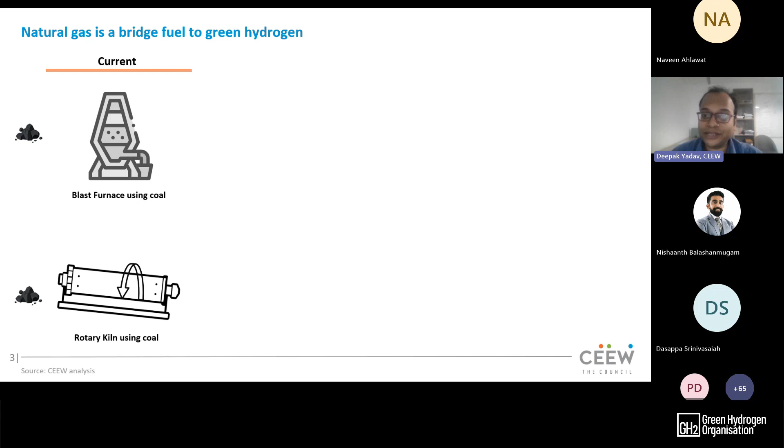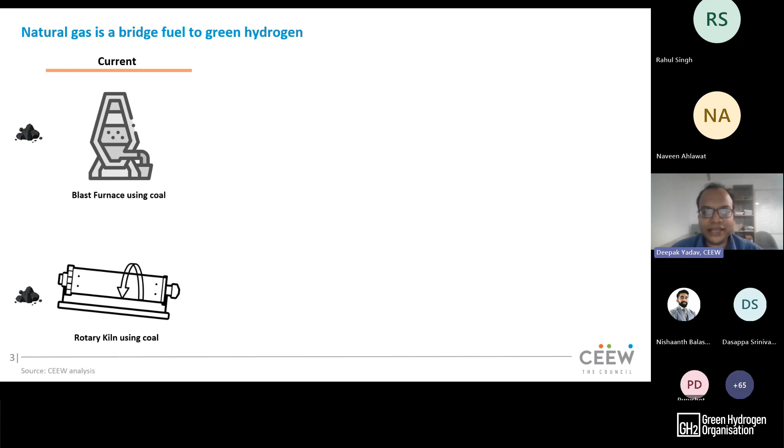The key thing here is that most of the current primary iron making technology in India is dependent on use of coal. Blast furnaces, for example, use coking coal, which is imported - in fact all of the coking coal that we use in blast furnaces in India is imported. There is also the rotary kiln, which uses partially imported coal, partially domestic coal, but these are primarily all coal-based iron making production pathways in India.

A strategic fuel for transition towards green hydrogen will be natural gas based shaft furnaces. I say that this is a strategic fuel because with the use of shaft furnaces, if you invest let's say around 1300 to 1500 crore setting up 1 MTPA of shaft furnace, you can have the same shaft furnace, but as and when the cost of green hydrogen reduces in the future, you can start blending in green hydrogen.

So you can start with, let's say, 100% natural gas use in shaft furnaces, and as the cost of green hydrogen reduces, you can start blending in 5% green hydrogen, then 10%, 15%, and gradually, as the cost of green hydrogen achieves parity with that of natural gas, you can seamlessly transition to 100% green hydrogen. Therefore, the key decarbonization strategy for India for greenfield capacity expansion will be not to invest in blast furnaces and rotary kilns, but to start investing in natural gas based shaft furnaces so that we can eventually transition to green hydrogen based steel making. That is the transition strategy.

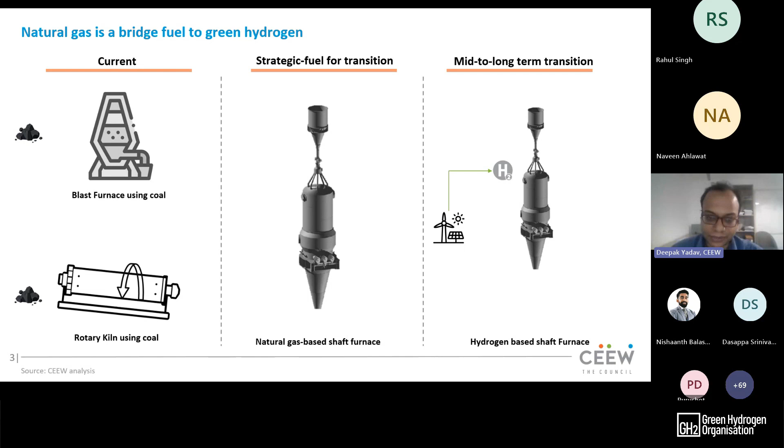Now, green hydrogen broadly finds applications across four sectors in the iron and steel industry. The first is green hydrogen can be used in blast furnaces, which is at TRL 5 globally - there are pilot scale demonstrations. ThyssenKrupp, for example, has injected green hydrogen in one of its blast furnaces and tested it for over 24 hours. Nippon Steel has an experimental blast furnace.

The experimental blast furnace is a replica, or a lower capacity blast furnace, but it operates similarly in principle to the blast furnaces. You can do all kinds of experimental work there.

Nippon Steel has actually tested hydrogen injection in blast furnaces, and they have estimated around 22% emissions reduction over a normal blast furnace that operates with coal alone.

In the Indian scenario, I think most of you might have read news articles recently. Tata Steel injected about 6 kgs of hydrogen, which is a very small quantity, around 3 to 4% of the total energy required for operating a blast furnace. But nevertheless, they have injected 6 kgs of hydrogen in the blast furnace. They have reduced coke consumption by around 10%, and reduced CO2 emissions by around 7 to 10%. So this is what is happening globally on hydrogen injection in coal-based blast furnaces.

Hydrogen can also be blended in natural gas-based shaft furnaces. In fact, the proof of concept of blending hydrogen in natural gas-based shaft furnaces was demonstrated in the 1990s, where 90% of the natural gas used for producing iron or DRI was replaced with hydrogen. They didn't use green hydrogen at that time because green hydrogen was very expensive. But the proof of concept does exist globally.

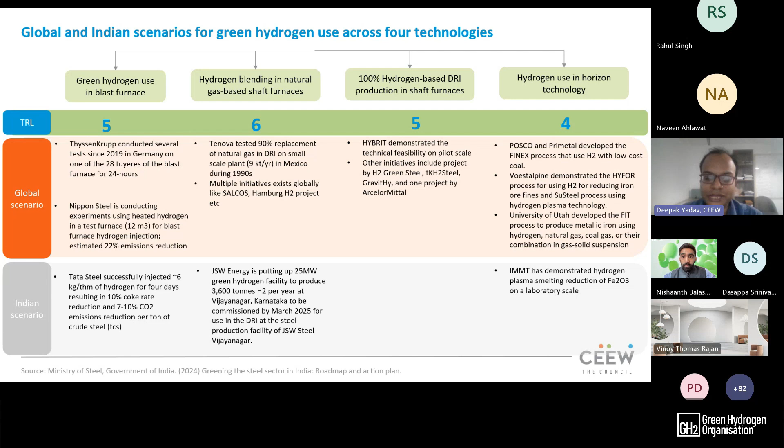Which brings me to the final slide, where we look at the basic techno-economics of hydrogen injection across three major pathways. First, let's talk about hydrogen injection in blast furnaces. Roughly, and this is again coming from the Ministry of Steel report, about 15 kgs of hydrogen can be injected per ton of crude steel.

Tata Steel demonstrated about 6 kgs of hydrogen injection, and there are also other studies that say this number can be increased from 15 to 28. There are studies on hydrogen injection through shaft furnaces, where the amount of hydrogen that can be injected is significantly higher. Nevertheless, we'll assume a conservative 15 kgs of hydrogen injection per ton of crude steel, which means the entire blast furnace capacity in India can uptake around 1.17 or around 1.2 million tons per annum of green hydrogen.

Our national green hydrogen mission has set a target of producing 5 million tons per annum of green hydrogen, so you can relate the consumption volumes possible in blast furnaces in India. Now, in case of blast furnaces, the biggest challenge is that with injection of 15 kgs of hydrogen, the emission reduction we can have is just about 8 to 10%, which is a very small number on a pan-India scale.

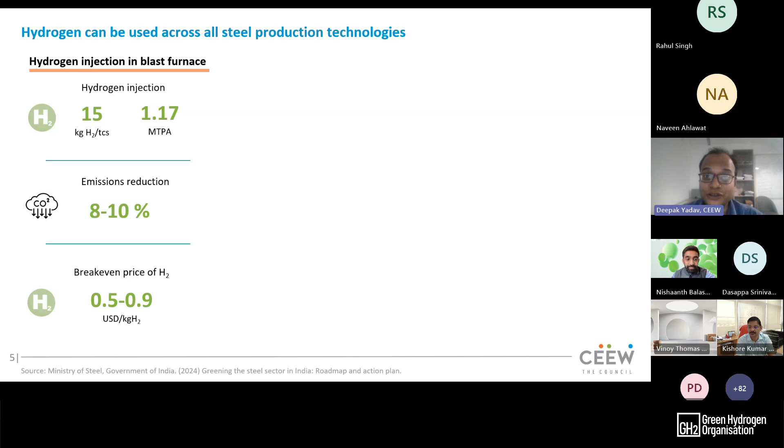The biggest challenge is cost. Why is this not happening? Because the break-even cost of hydrogen for injection in blast furnaces is sub $1 per kg. So we talk about one target on green hydrogen, but this is even below that particular target. Therefore, hydrogen injection in blast furnaces might commercially materialize once the cost of green hydrogen reduces significantly, and there is a certain carbon tax that is also levied.

The second option is hydrogen injection in natural gas based shaft furnaces. Here I'm basically talking about the existing shaft furnace capacity in India, which uses either natural gas or other gaseous fuels, like coke oven gas or other industrial off-gas. Since these shaft furnaces are very old vintages, we talked to a few industries and assume that around 60 to 65% of the natural gas consumed in these furnaces can be replaced with green hydrogen.

Therefore, assuming 60 to 65% replacement, we can start consuming around 42 kgs of hydrogen per ton of crude steel. The shaft furnace installed capacity in India is very low, around 12 million tons. So the total hydrogen consumption possible is only 0.4 million tons. The good thing is, unlike blast furnaces, with green hydrogen injection about 55 to 60% of the total emissions from the natural gas route can be mitigated.

The residual emissions can be mitigated by switching from grid electricity to renewable electricity, and there will be some emissions left since hydrogen isn't replacing natural gas on a 100% basis. The break-even price of hydrogen to replace natural gas is around 0.75 to $2 a kg, depending on the price of the incumbent fuel. For $8 per MMBTU natural gas, the replacement cost is around 0.75. If it goes to 16 to $18 per MMBTU, hydrogen breaks even at $2 a kg.

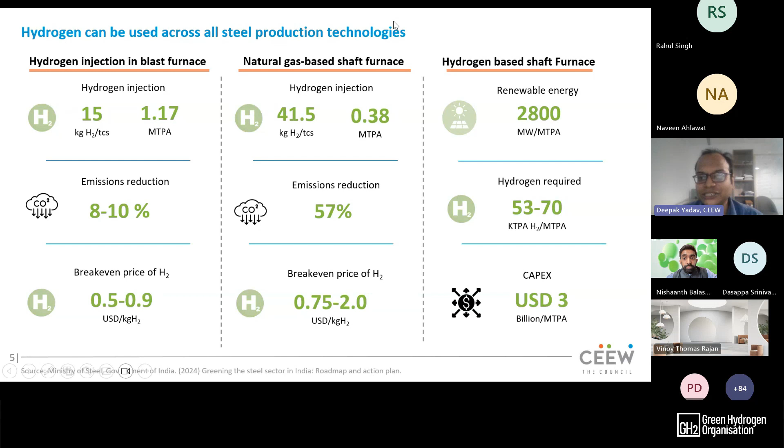There are also corresponding cost implications. For example, using a 100% hydrogen-based DRI unit, your cost of iron or steel is around 50 to 60% more expensive compared to the blast furnace route. So those are the challenges associated with hydrogen-based shaft furnaces.

I just have 3 slides to present, Nishaanth. So I'd like to hand over the stage back to you.

Thanks very much, Deepak. And I like what Shweta asked in the group, which is, what does TCS stand for? If there are little things like this you want clarification on, please write it down in the chat, because the idea and goal of this webinar is to educate the larger audience on where we can apply green steel or green hydrogen in all of these industries.

Well Deepak, I think you've highlighted quite a lot of important points in this presentation. But clearly, the steel industry produces almost 3.5 billion tons of CO2 every year. And in India alone, our per-ton emissions from steel is the highest in the world, between 2.5 to 2.7 kgs of carbon emissions per kg of steel.

So I think we have to do quite a lot. As we go into this webinar, we'll hear from industry experts on what the government has done and what steps companies are taking to decarbonize this. If you have more questions on these different steel making pathways, please put it in the chat box. We'll answer all these questions as we go into the panel discussion.

But before we go into the panel discussion, let me introduce Professor Dasappa. Professor Dasappa has been one of the leading minds here in India promoting biomass-based pathways for green hydrogen, and he's quite a pioneer in the work he's undertaking. Professor, I'll leave it to you to give a small introduction about yourself, and then we can go through your presentation.

Thanks for this. I'd like to mention that while I have been working in the area of biomass - basically combustion and gasification of solid, liquid, and gaseous fuels - over the last three decades, we have been venturing into something which this country really requires attention on, unlike other resources which have got benefits through policies that have taken place. Keeping that in mind, I'll introduce the technology we are trying to look at.

I just thought I should say that everybody is interested, like what was presented by the previous speaker, as there is quite a bit of interest taking shape in terms of what needs to be done, how do we really look at it. The major emphasis has been on making sure we generate hydrogen through electrolysis. That's one route which has been there, and one is not against it, because of what happened with solar and wind in this country compared to other resources - it seems to be taking a pathway along this direction.

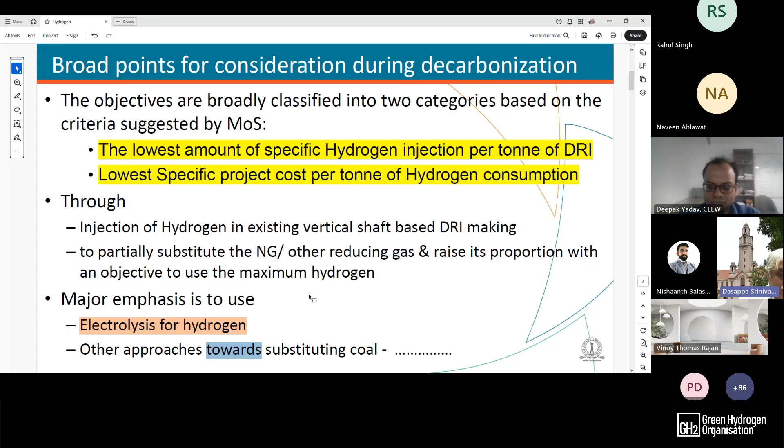Internationally, if you really look at it, people have been looking into various aspects of how we decarbonize. There are very serious contenders with respect to the technology itself, and a few technologies have also been adopted in this country - a couple listed here show the reduction in carbon footprint significantly when you move from a solid fuel to a gaseous species. That's very evident, and people have been trying to see whether they can reduce the footprint further by using hydrogen. Hydrogen coming from various sources is what people have really been looking at. And there are small spurts of things happening in terms of using a naturally available substance called biomass.

The reason I'm calling this renewable hydrogen, or green, is the recent concept people have been talking about. In terms of renewable, there are only two strong contenders with respect to hydrogen being part of their natural resource - one is water, second is biomass. Water, through electrolysis, you get hydrogen. The other is through the other process which I'm going to introduce to you.

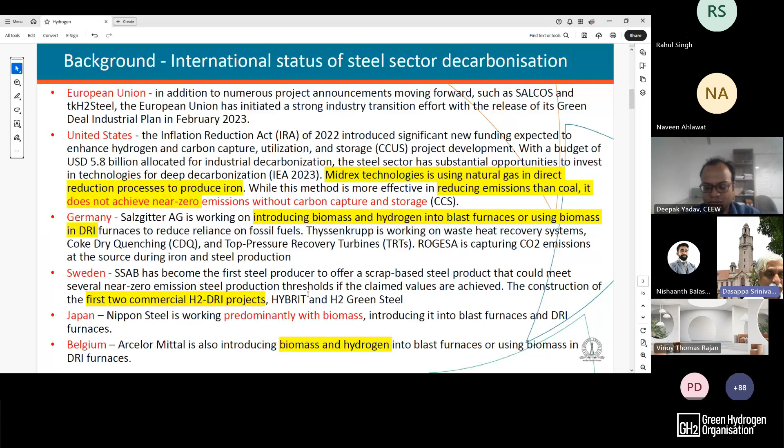People have been talking about biomass in various other countries, but probably it has not taken shape as much as what we intend to do in India. I think this is something we can discuss. I should also confess that it's only in the last 6-8 months we have been venturing into hydrogen for the steel sector through the biomass route. In terms of the overall process, we have understood significantly over the last 6 months, and we believe there is a significant amount of penetration which can be done.

Keeping this in mind, there are projections cited similar to what was presented earlier by Mr. Deepak, saying that unless you really peg your cost very, very low, you will not be able to really look at what can happen. Here we are trying to look at reductant, not exactly hydrogen - it could be a combination of CO and H2, which is also very critical in terms of the overall process people have been looking at.

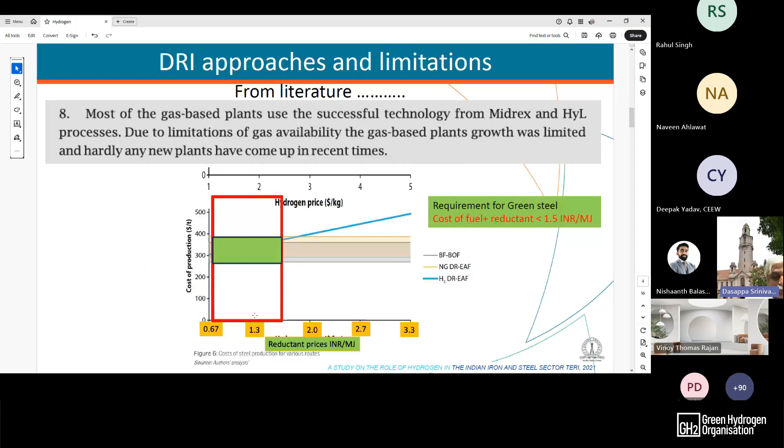See, for example, this plot shows the hydrogen cost which is required, which was the number projected for decarbonization. I'm trying to bring out the reductant price in Indian rupees per megajoule. If we can be within this box, it can become very competitive - say less than about 2 rupees, maybe about 1.5 rupees per megajoule, is something we can keep as a reference.

The process I'm looking at is taking a solid fuel. People who have been accustomed to looking at gasification of coal, I think this is something similar, except that this is going to be completely green, being a resource which is renewable by nature. And the solid fuel gets converted to gaseous fuel.

On this platform, in terms of generating electricity and using it in a gas turbine, we have done quite a bit of work. We have done technology transfer across the globe, including somebody like GE taking technology from IISc. We deployed this within India and outside India, in Europe and various other locations across the globe. And proud to say that generally technology comes from north to south - here we have been able to do from south to north too on that platform.

But unfortunately, the power generation things did not take off as much as what this country could hold on to and carry forward, maybe for a variety of reasons - policies were not as encouraging as what it is today. Today, even on this platform, there are various applications where we are looking at decarbonization because of the CBAM coming in.

Now, over the last decade, we have been moving away because power was not the kind of thing - we have moved into fuels and chemicals, where hydrogen and syngas become very important in the context of what we have been looking at in the steel sector. Plus, we are also looking at downstream fuels like alcohols or ammonia or various other things.

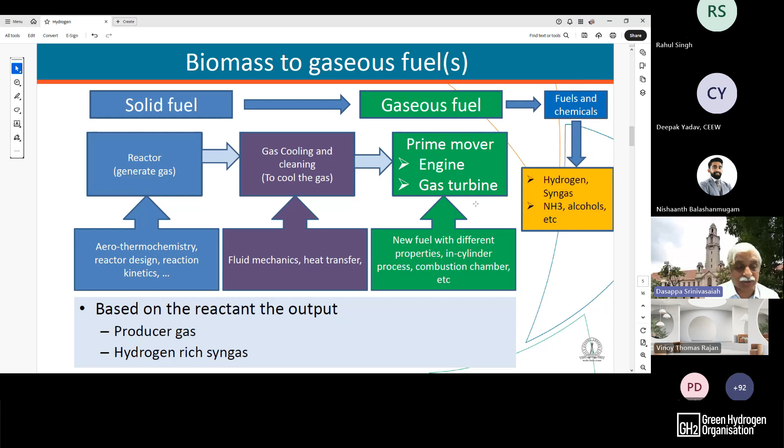This is just to give you the technology. Here we take biomass - it could be any of the resources you see, from coconut shells to corn cobs, or any loose material converted into briquettes. This is the range of things which can happen, and it's one of those systems which is agnostic to fuel.

A combination of these, or independent of any of these fuels, can be used, and it generates a hydrogen-rich syngas depending upon the end use, based on whatever we have been exposed to in the steel sector over the last 6-8 months. We believe this syngas is good enough to go as a reductant into the steel process.

This is something we are now seriously contemplating, and we also had an occasion to visit the Vijayanagar plant, and we saw the Corex plant generating the gas - it's very easy to strip off this CO2, which can become maybe a carbon sequestration, and you get similar gas which goes into the so-called hydrogen-based or natural gas-based hydrogen generation system into the vertical shaft kiln.

I think combinations can be real quick, and this is where we can also generate based on a controlled approach. You can also generate some carbon which can go back to the processes we have been looking at.

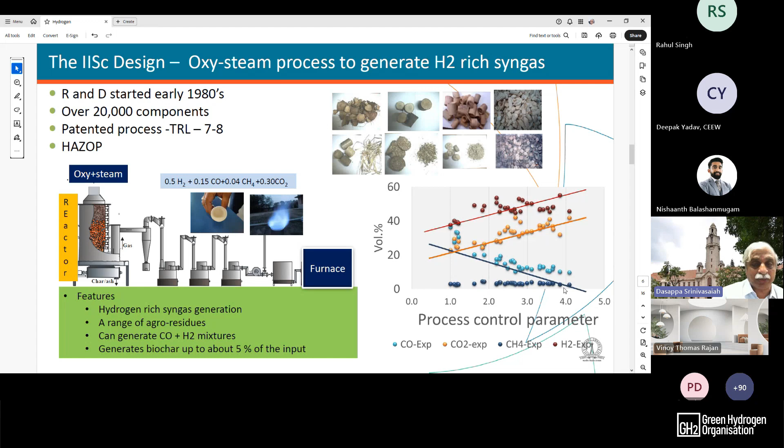The greatest strength of this process is that a range of compositions can be generated, which may or may not be an attraction for the steel sector. But if we are looking at downstream chemicals, this becomes very important. It's just to show the flexibility with respect to this.

Here we have been looking at a gasification system, which you saw - it generates hydrogen-rich gas. We have technology to separate hydrogen. One stream can become - we have already demonstrated fuel cell grade hydrogen for a range of biomasses, which can go into a fuel cell.

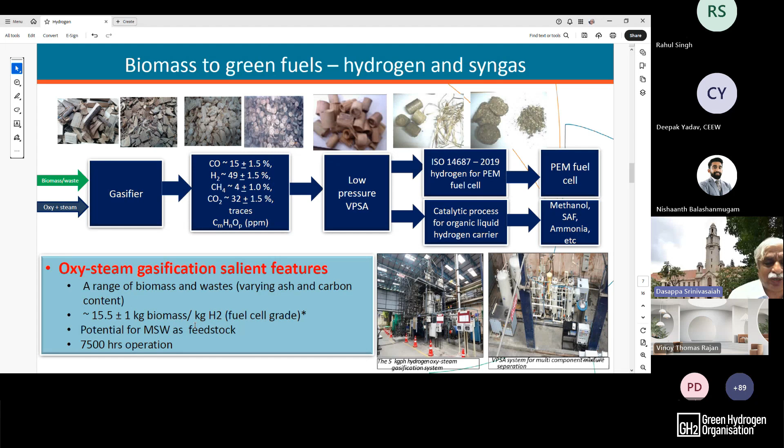And as I told you, we have been looking at methanol, SAF, ammonia - these are all the derivatives which can be looked at to see how to carry hydrogen into various downstream processes for conversion. Typically, for fuel cell grade, about 15 kgs of biomass is required for every kg of hydrogen, which may not be the case when we really want to look at the syngas, which can go into the...

...so-called steel sector. Here, as I told you, we can generate this gas, and this gas can go into separation - CO2 can be separated, and we get an H2 to CO ratio greater than 3.

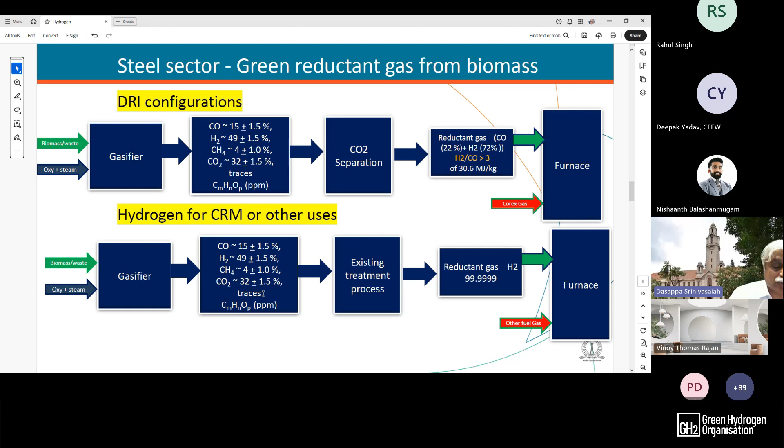With about 30 megajoules, it's an ideal process to substitute natural gas in the vertical shaft kiln, and we can also use this as a replacement for coal in various downstream processes. Based on the technology available, in some cases like cold roll milling in the steel sector, the requirements are extremely high purity hydrogen, and I think even that can be achieved through this process. That means there is a pathway to get green hydrogen through bioresources available in this country.

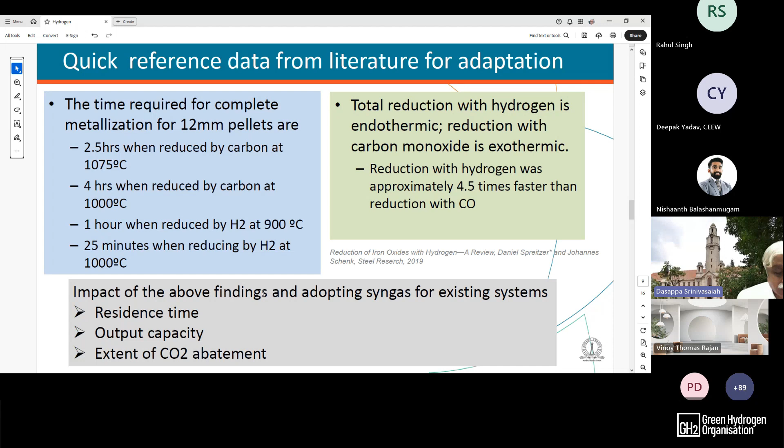Some additional fundamental work we've looked into relates to the presence of CO and H2, where there could be a trade-off because of the exothermicity and endothermicity involved. We should be able to deal much better with the outputs and other aspects. Some fundamental study has already been initiated, but to start with, the technology is available for us to move into the space of decarbonizing the steel sector.

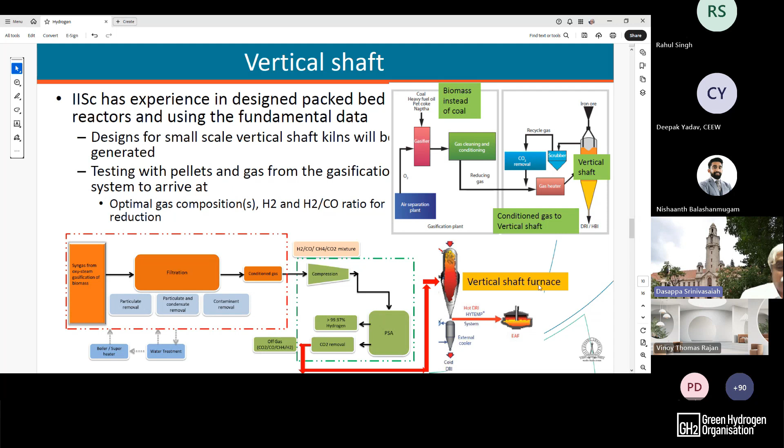This experience is typical of what we see: you generate a gas with CO2 removal, it can go into the vertical shaft kiln, and as I've shown, the H2 to CO ratio can be controlled to get whatever is required for the process. In the technology package, you have a syngas generator, a gas conditioning system to remove impurities as much as you want, and it goes through a compression cycle with a PSA where CO2 can be removed, giving pure hydrogen that can go into the vertical shaft kiln or other applications.

We've also been contemplating using this for a very large scale activity our country has been doing in rotary kilns. We believe there were some interesting approaches done maybe back in the 80s which haven't been revisited by various groups. We've been looking at these things, and I think the industry needs to see these demonstrations, which we are keen to pursue to take it forward.

The Allis-Chalmers system was designed to take solid, gas, and liquid as fuel, and we believe the gas I've shown you can go into these systems, with probably a very simple modification to the entire setup. There are other options for under-firing the entire bed to replace the coal going into the rotary kiln and also reduce the overall process. I think there are significant opportunities available there.

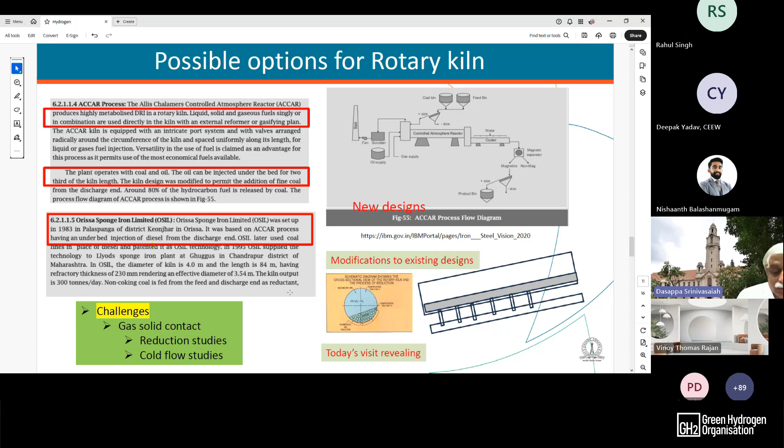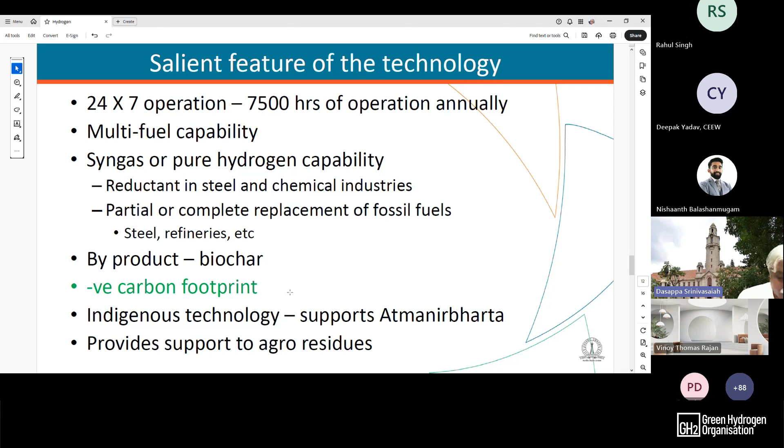The salient features of this technology are 24 by 7 operation, multi-fuel capability as a reductant, and we get some biochar which can go back into the overall process. Once we remove the carbon, it can show a negative carbon footprint, and it's an indigenous technology. When the Government of India is looking at indigenous technology and providing support to farmers and other areas, this can make a big impact.

With this, I will leave it at this stage. It can be techno-economically feasible compared to Corex gas in terms of generating the gas that goes as a reductant, as some numbers are already available. It can be as competent as that, with the caveat that it is going to be green. And I think this is where I would like to stop, looking forward to detailed discussions as we move forward.

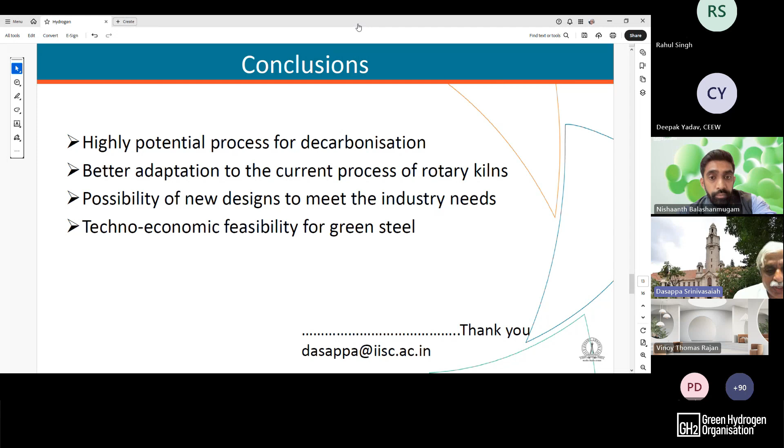I think you've highlighted the historical journey we've taken in this whole sector, and of course hydrogen and biomass-based or green hydrogen serves as a big component in decarbonizing the sector. It's quite warming to see all the innovations you're working on to adopt biomass into this, and clearly India has a lot of potential for this.